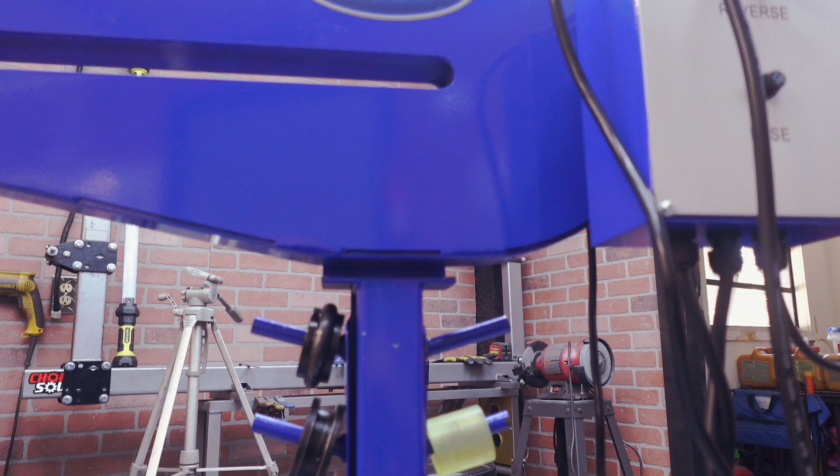But before we get started on the new build, let me show you what they sent me. Yes, we've got an electric bead roller. Look, this thing is amazing. I ordered some more dies, and they're gonna be here like tomorrow.

I know the video came out a little late, we missed the Sunday, but I have so much going on as far as getting this new build ready and ordering parts and all that stuff. So yes, we did get our own bead roller, which we're gonna need because I've got some ideas for the tank we're going to be doing on this new build.

I'm going to show you a quick sketch of it right here. A quick backstory on this sketch - normally you guys know that I do not do other people's designs. If I'm building something, it's usually my design, my build, something that I'm going to be doing for myself. And I was just searching the internet looking for some ideas, and I came across the picture you just seen, and I was intrigued.

It's very much like my style - the frame where it comes back and the seat, doing the bobber seat, all that. A lot of that is very much like what I do. Other than the fork, I've never done a fork like this before. We're gonna give it a try.

So there's some things on the frame that of course don't work. They work in drawings, but they don't work in real life. Like the wheel looks like it's touching the head tube - there's things like that that aren't gonna really work. I can't run a fender like that. There's no handlebars on it, so I don't know how that's gonna look. Handlebars definitely change up the look of a frame, so we're gonna have to figure that out as well.

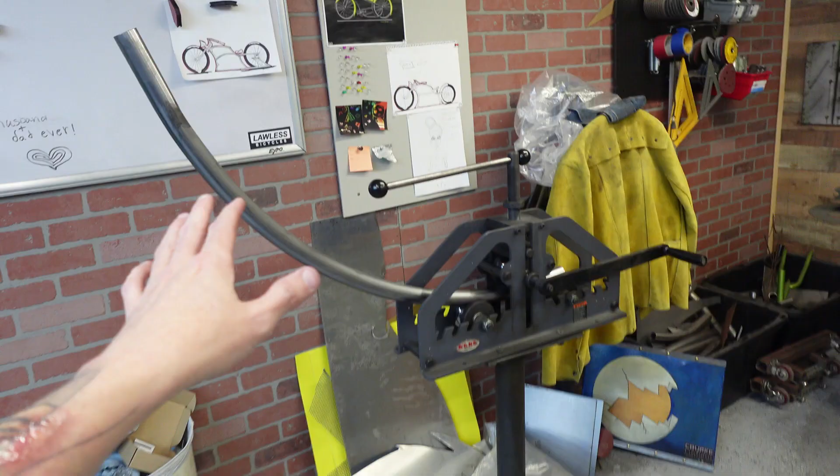All right guys, so I'm getting some stuff bent up. This is going to be the lower seat area there. I've already got this kind of bent up. This kind of looks like it's not roller bent - it looks like it might be straight and then have like a little curve up.

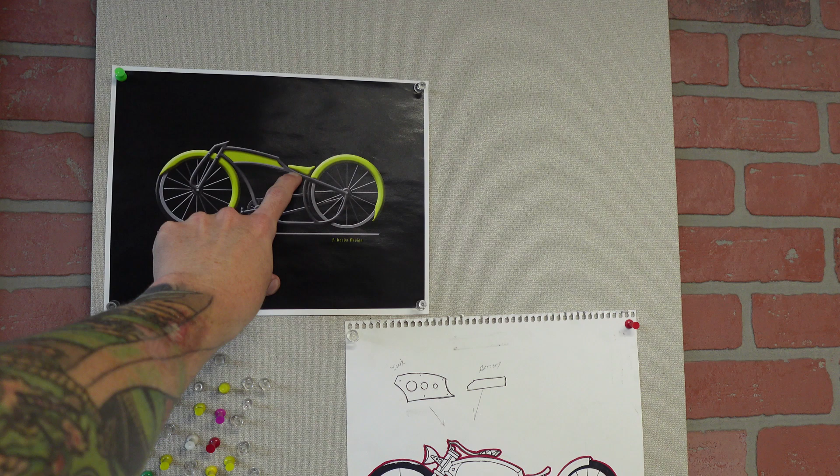So right now, got it laid down. Backbone, I think I'll use this tube here. I'll put my 1.5 inch dies in there, and then I think I'll just get it to where it kind of just goes up like that.

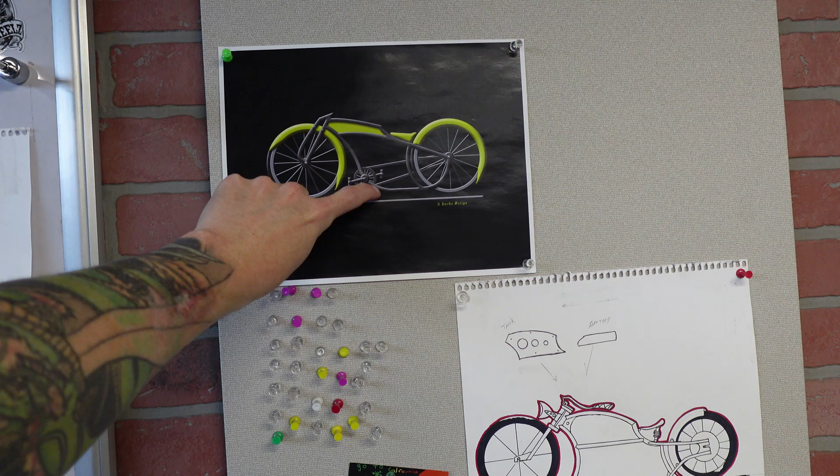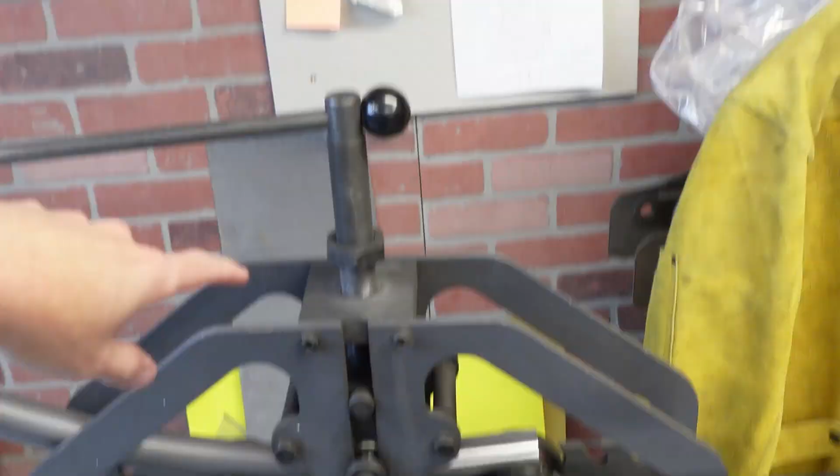Other part, we're gonna have to bend this one here slightly, and then this one here - he drew it kind of like a curve, but that curve is gonna be hard to do without causing a dent. Like if I put it in here, it's going to cause a dent right there. So if I can get it here and then roll it up, there is going to be a difference between here and here, how I do mine.

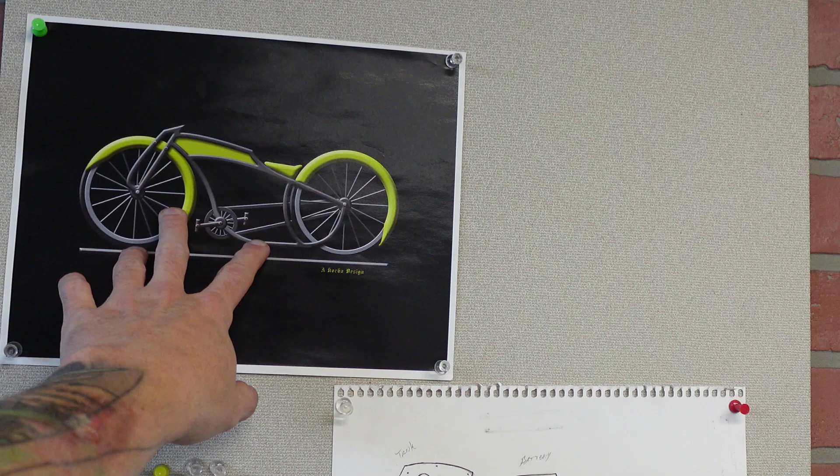So this is also a lot higher off the ground than what I would normally do. So I probably won't be this high off the ground, we'll be a little bit lower, but we'll figure that out later. I gotta draw it up on the table, but the table's kind of messy right now.

This video is gonna kind of be a lot of talking, so I apologize, but since we're working through this as I go, I can't really speed through it like I normally do because this isn't something I normally do.

So either way, I'm gonna finish bending this. I need to get a much tighter bend, and then we'll probably go ahead and jump on the other tube, the down tube, bend the down tube some. I don't want a big bend there, but it does have a little bit, and I want to get as close to the drawing as I can.

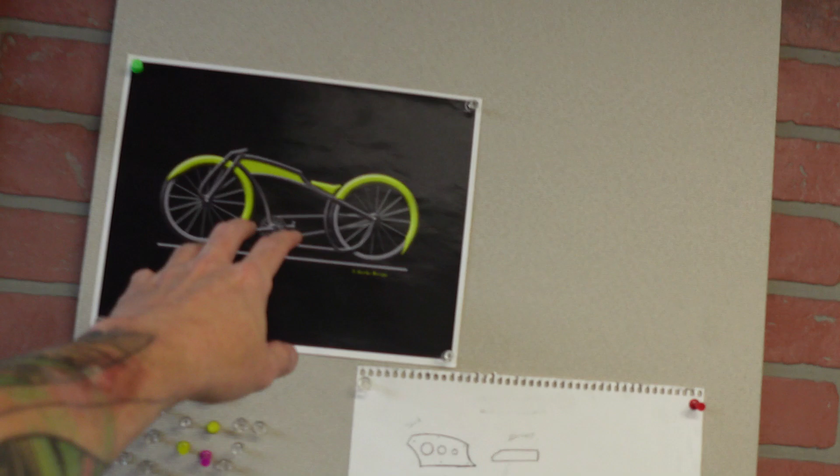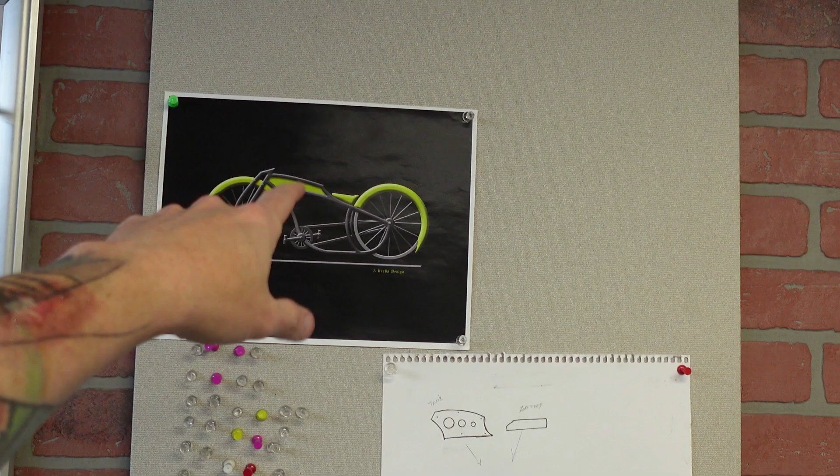We are going to run a bobber seat, but I am going to run a shock on it, not springs. We're trying to keep everything less motorcycle looking. So that's on order, just ordered the shock for the seat. I'll probably have to have another seat made because mine's brown. I want to do everything on this with black and some other colors, more sinister looking, not really hot rod looking. So, oh well, let's get to bending.

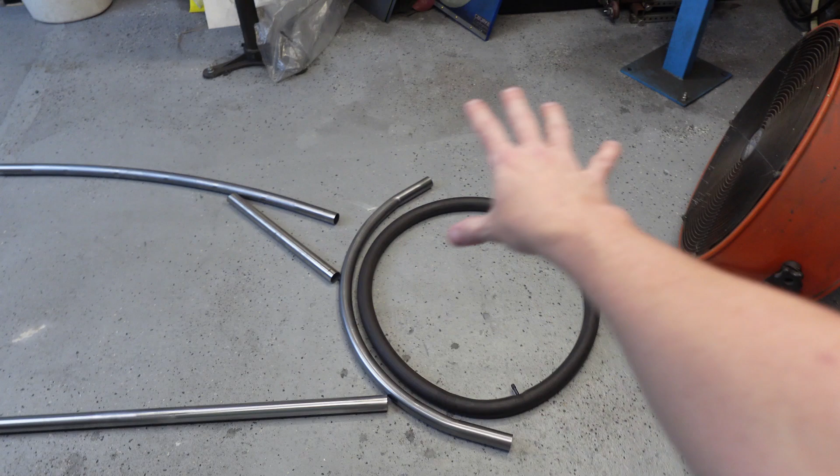So I'm just laying it on the floor. I have a 3-inch tube right here, to give me an idea of where the wheel would sit roughly to the ground. So we're just kind of feeling it out right now. That'll get chopped some, that'll get bent up. I really don't know where that's going yet. Frame, of course, won't be this wide, but I just want to lay it on the ground, kind of get an idea of where it's going to be.

Let's go clean this table off and try to get a drawing on this, because I have a feeling that because of where I put my head tube, it's going to be a little bit lower than what this frame's going to call for. We're going to have to move that head tube up, and kick it a little bit more, less of an angle. I think I'm like 56 degrees. Probably have to kick that up a little bit, give it less of an angle. But other than that, so far so good.

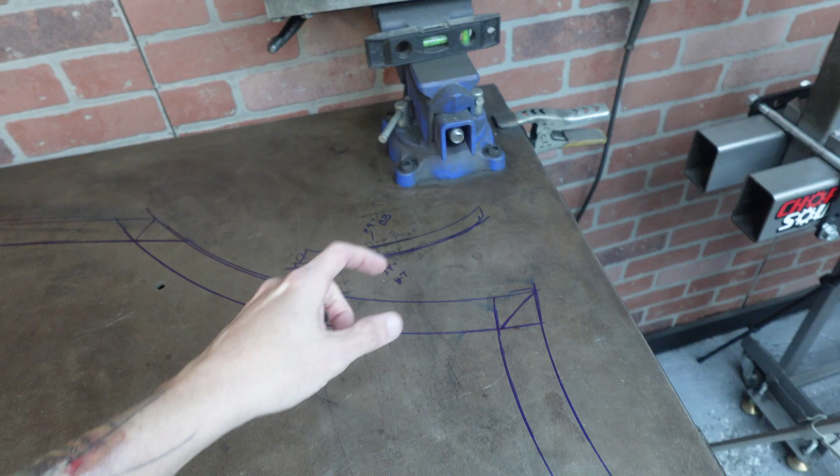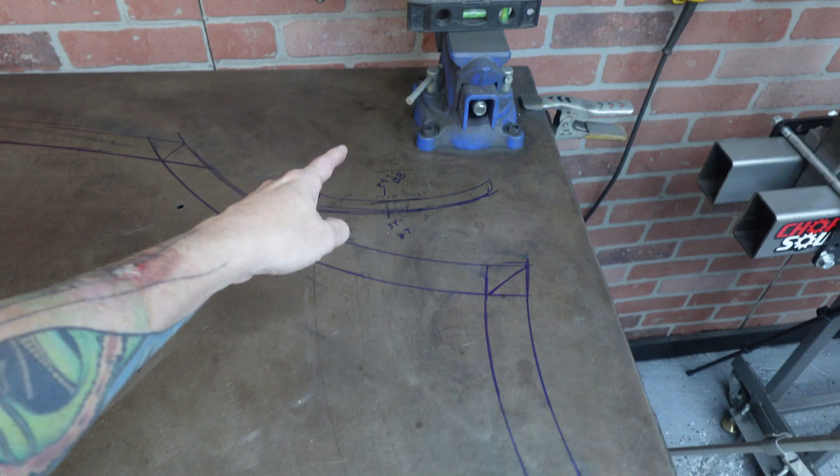After drawing this out, I think I'm gonna have to go up more and have the frame maybe come off the top of the table and then come down, and let the seat be up a little bit higher. With it being a 29, I can do that. Basically what we'll do is take the whole frame and shift it this way. So normally you're coming really far down here, but spreading out further to your bottom bracket. If I do this, I can actually shrink the frame some. Bringing the seat up will allow me to have the same distance from here to here, just do it up there, if that makes sense. So that's what I'm gonna do.

I'm getting this one bent here so that I have the down tube, but like I said, usually my issue is running into this here. If I just move it up to there, I can clamp that down, and then we'll just run that, and then work on it, because this is where the bobber seat is roughly gonna be. I can actually come a little bit further and do it that way. Let's kind of see how that works.

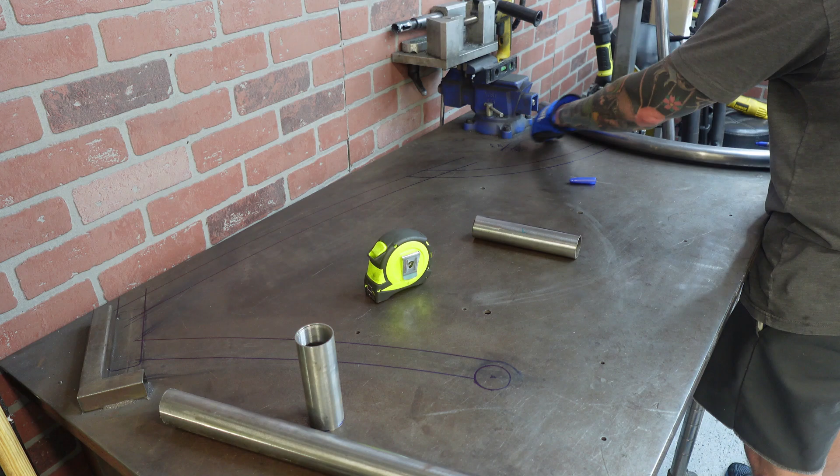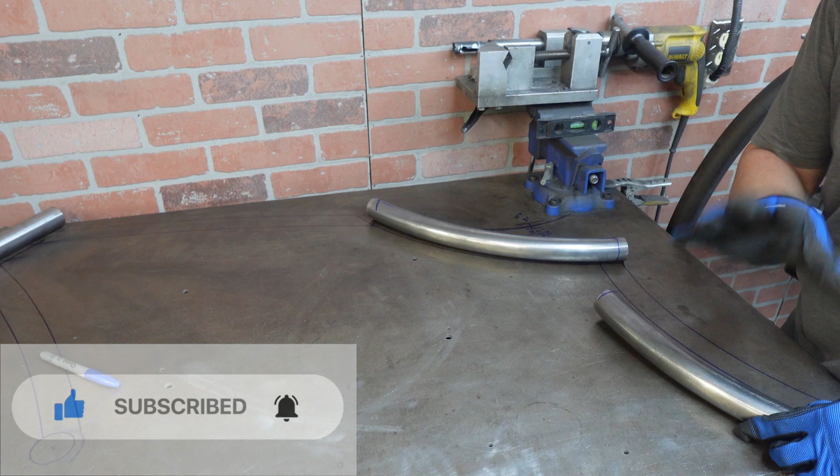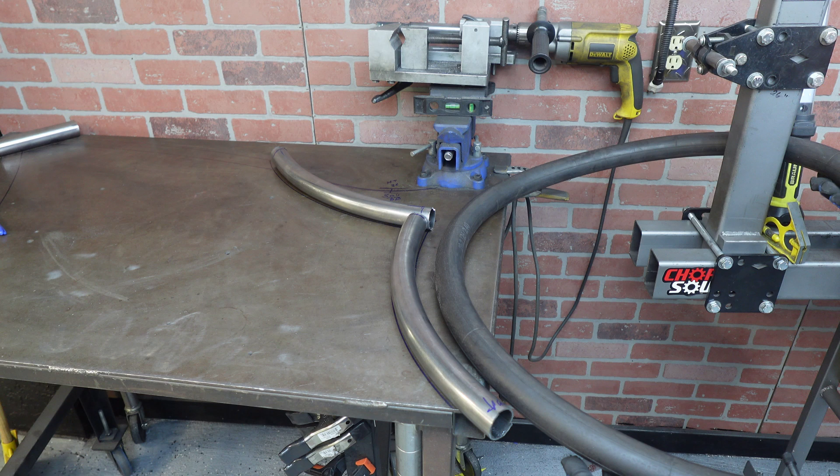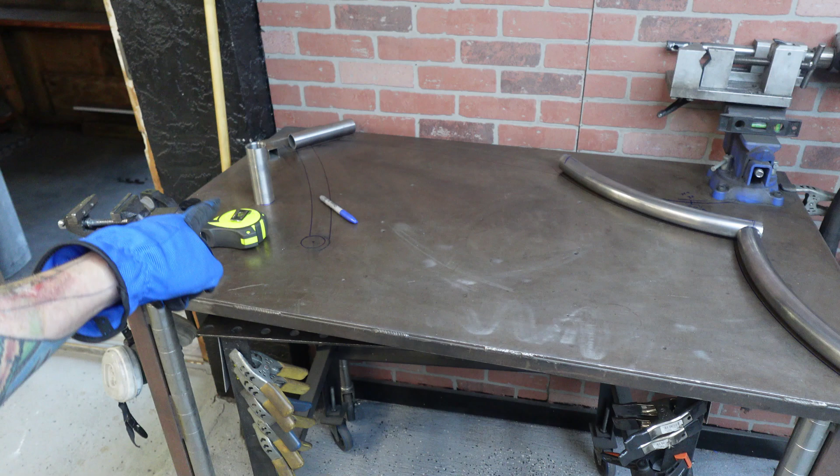So now what we got to do is cut the upper backbone. I'm going to notch it first, cut it, and then we'll go ahead and work on the down tube here, and then go throw the other tube that we have in the bender. That way we can bend up, because this angle is going to be the angle that's going to come in here, and then I need it to kick up and land in here somewhere.

You guys don't mind that bottom bracket that I'm using. That'll be a secret for later. So stay tuned and you'll find out why I'm using that.

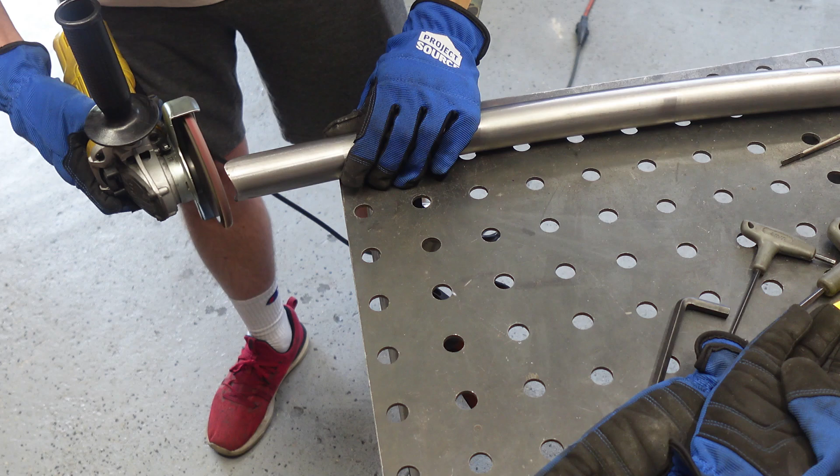Got that center section pretty much fit up. Head tube ready in place. I made a little block so I could move it up some. Everything's coped. I did move this tube in just a little more, which is fine because of where the seat's going to be. This is going to allow this to come up and have a little bit better transition.

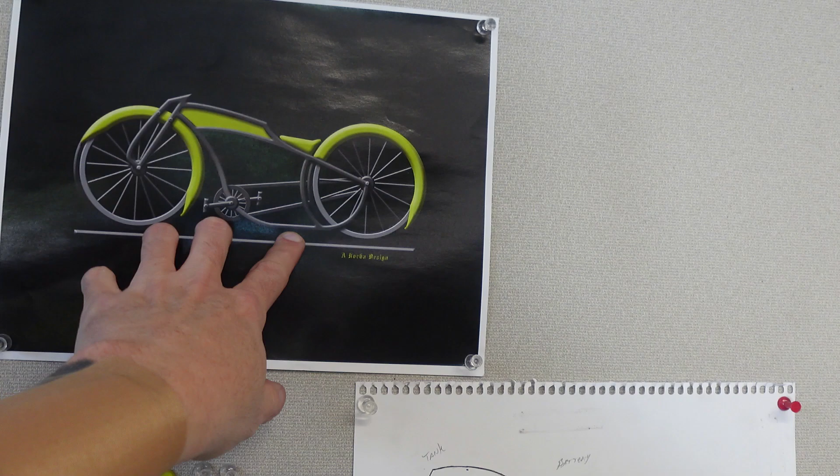This is bent up. Now, right off the bat, you're gonna notice in the picture the lower tube is a lot higher off the ground. You could probably fit your shoe plus underneath that, whereas usually mine is about as low to the ground as you can get while still fitting your shoe under it. So it's a little higher than what I'm going to do anyway, but the way he has this ran, it goes here and bends up right to the bottom bracket. You can almost tell it flowed like this was all one piece, which I can't do because he does have a bend right here.

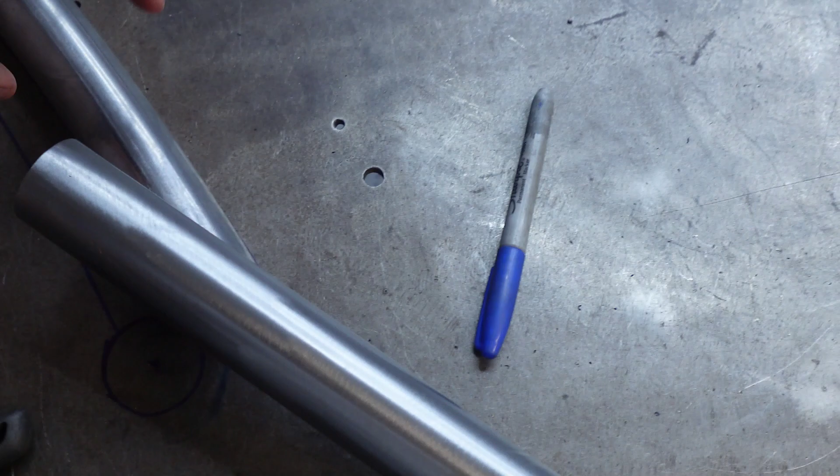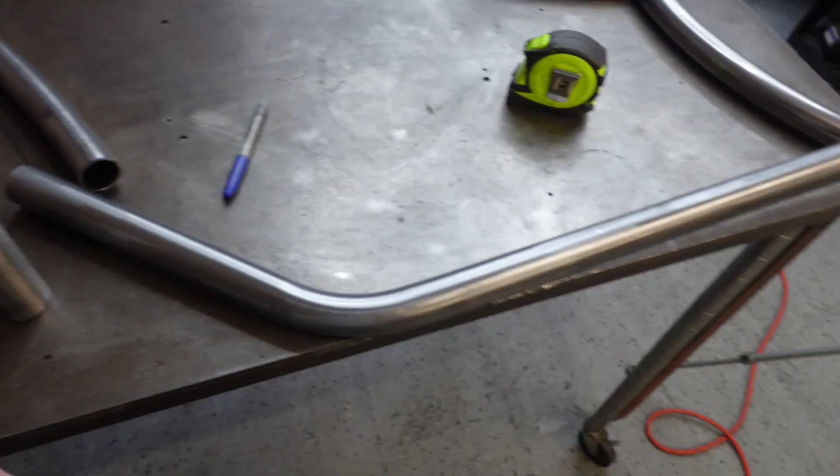So it goes this way and then has a little notch. I'm gonna try this - I think if I can stick this tube in the bender and turn it that way, just a little boop, then I think I can get this to be exactly where it needs to be so it can run and then kick that way, but it's gonna be hard to do. You can only fit so much in here - when you put the tubing in the bender, it's only going to allow you to here.

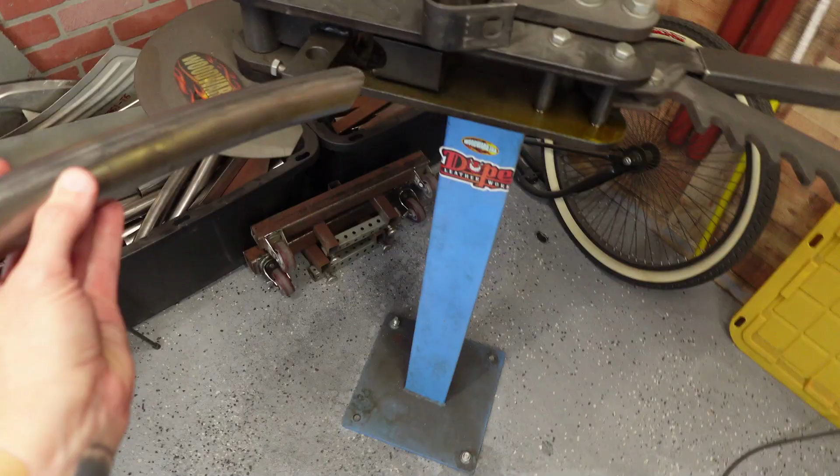So I'm gonna try. With it already being bent, that also gives you a little bit of an issue, and I don't want to mess it up, but let's stick this in there. Probably need to see how much - it's gonna go this way. So you can see when you stick a bent tube in there, it's not gonna enjoy that. I'm gonna try that right there, because this tube's as long as I want it to be, and maybe I can give it that little kick. Let's try it.

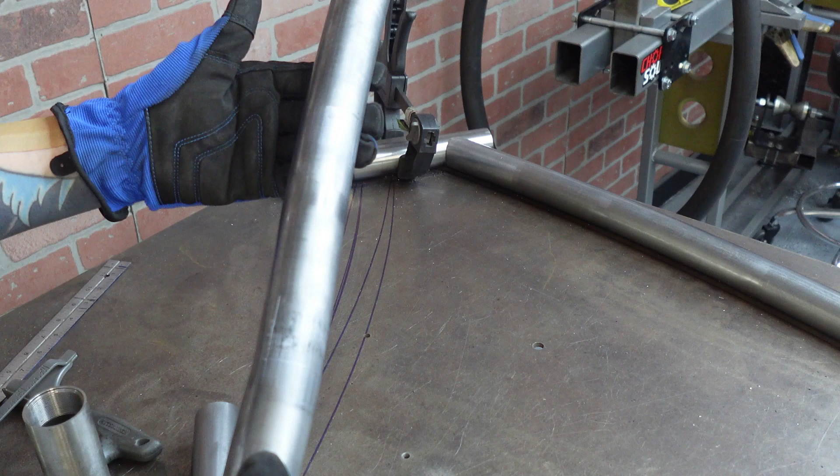That might just work. Let's set it over there and see what it does. All right, let's see - we're gonna have to do some sanding just to get the metal pretty again, but I think that's gonna work. So it's there to there, that's going to work. What I'll do is cut this at an angle so it butts up correctly, but that goes there.

This will go here. I like my bottom bracket about 8 inches from the ground, so yeah, that's about there. So that'll go in there, and that's gonna work, and then it's got that little kick. Yeah, all right, cool. Let's clean this up a little bit - that bender leaves some nice gnarly little metal scratch marks in it, so I'm just gonna clean it up before I weld it on.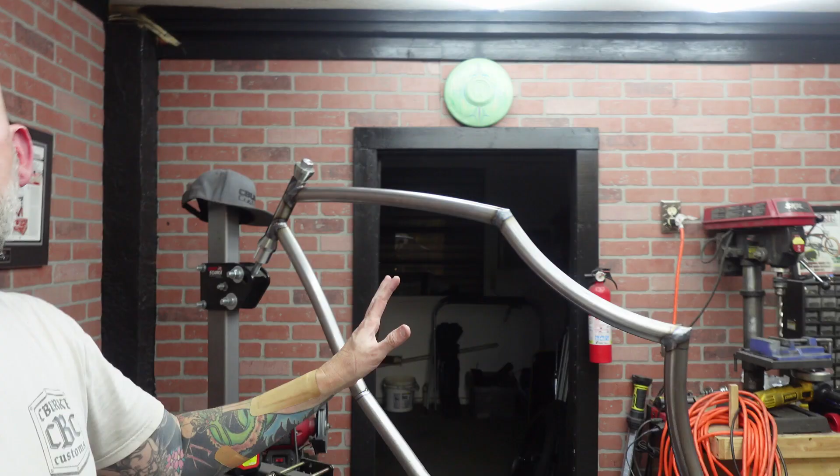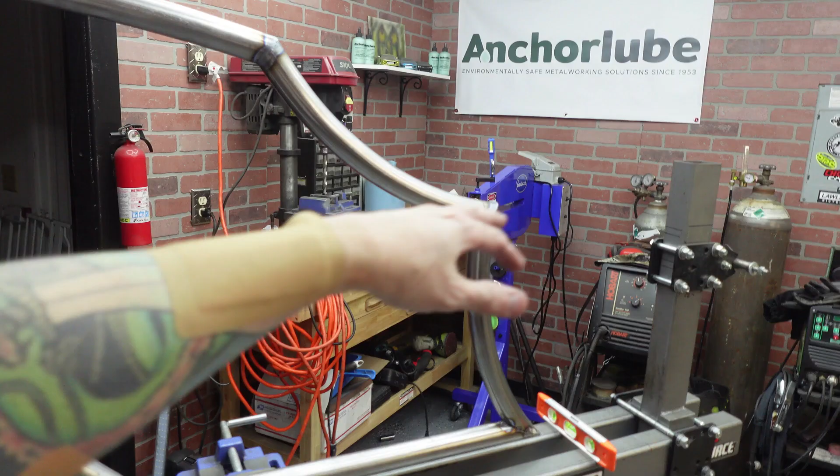I think it's close to the rendering. It will look more like the rendering once the lower chainstays are on and the seat's in there, because the upper chainstay is going to really cover this area. I think in the drawing he has the upper chainstay going like this, but I'm not going to do that because I have something I'm going to be running in this vicinity, and I need it to be a good solid tank, and we'll explain that a little bit later.

But everything's been TIG welded up. The top's going to get ground down. I don't really have to do much here because the bottom bracket is going right there, so we don't need to weld all that up. We're going to drill through that. And I do need to get the bottom down here, but I wanted to do it while it was in the jig. But she's straight, and that's what's important, is that it's super straight.

It is really high up on my head tube, and that's because we're going to be running a 29 inch wheel here so close that I don't want it to hit. So this is up quite a bit more than normal. But yeah, looking pretty good.

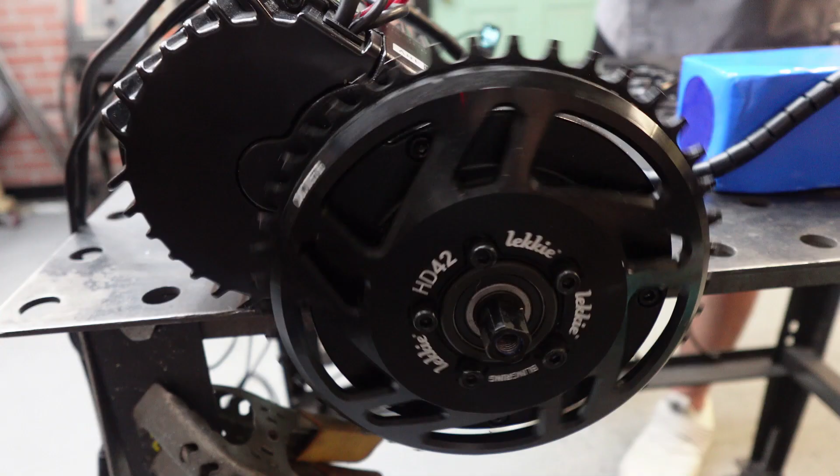This is an XT60 battery connector, and then after that, it's a Bafang parts buffet, if you will. You have your cable harness that brings you up to your handlebars. You have an extension as necessary. I brought this because you're known to build longer bikes. Yes, but I think we've got it figured out.

This is a speed sensor connection, and it has a magnet that you actually screw or clip onto the spokes, and then it passes by a sensor and allows the motor to know that the wheel is running, and then counts the number of rotations so you can calculate speed. This is a gear shift sensor. Don't think we're using this, single sprocket rear. Correct, all right. And then this is more of a minimalist SW102 display, very small, but it'll give you a speed readout, let you know your settings, and what your battery rating is.

Universal thumb throttle. We did test this out before we got the camera rolling and found that I brought the wrong brake handles, but they're definitely not needed. So we were able to get this going.

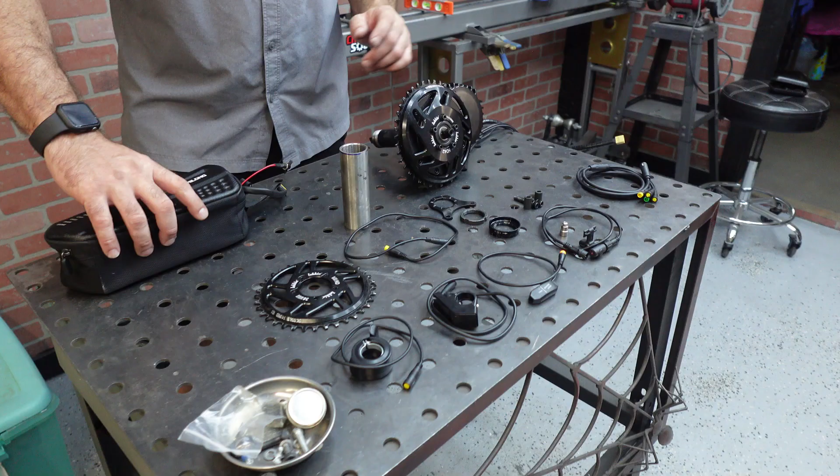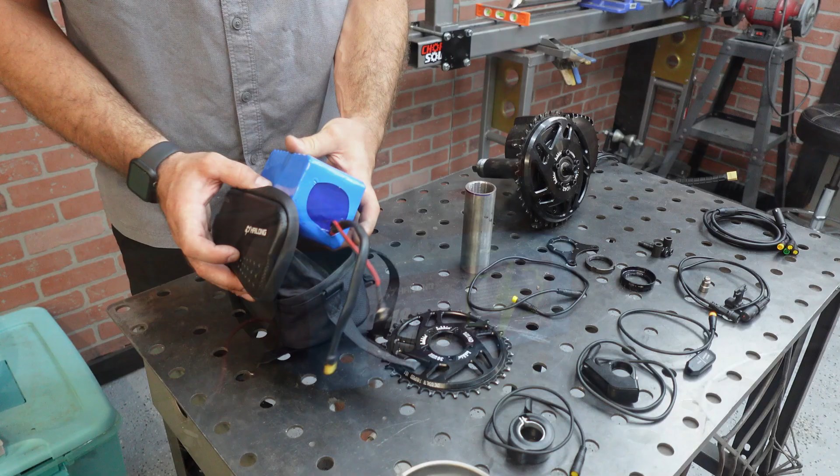It is going to be powered by a 48 volt, 10 amp hour battery. I use this battery on a lot of our dual battery videos on the Electric All Wheel channel, and that's way smaller of a battery than anything we've used. It is the most nice compact. Generally what I do is it's in the bag, and then I just strap it to the e-bike frame, and then suddenly I have more range.

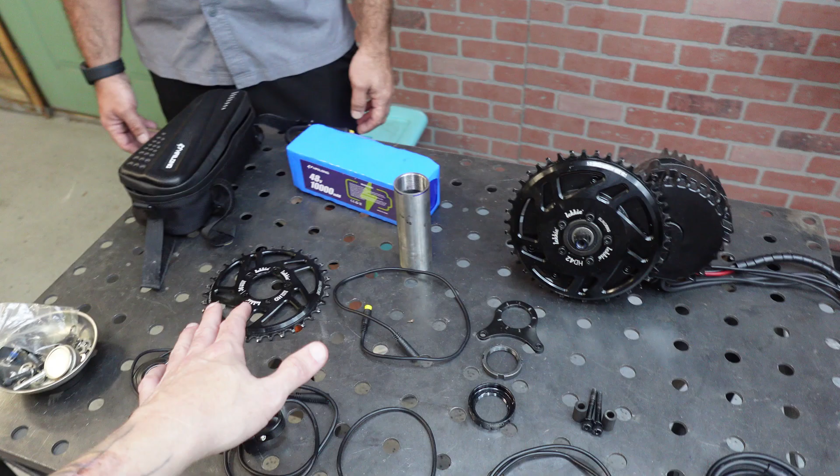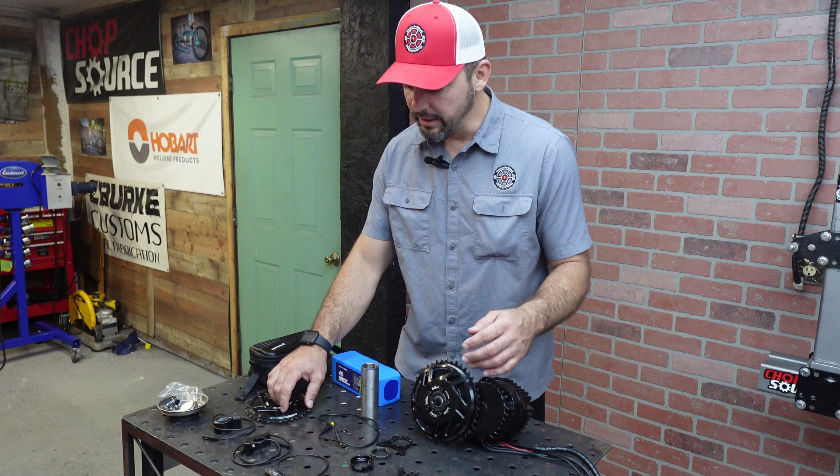Explain that. What would the difference be between using those two? So at a lesser teeth count, you have a lower gear ratio, and so the essence of that would be a lot more torque. As you move into a higher teeth count, it's harder to get it running, but once you do, you get a lot more speed out of it.

Okay. And that's where you and I differ, right? I'm a speed junkie, and you're about the slow motion. We're about going as slow and low as we can, because that's how we do it.

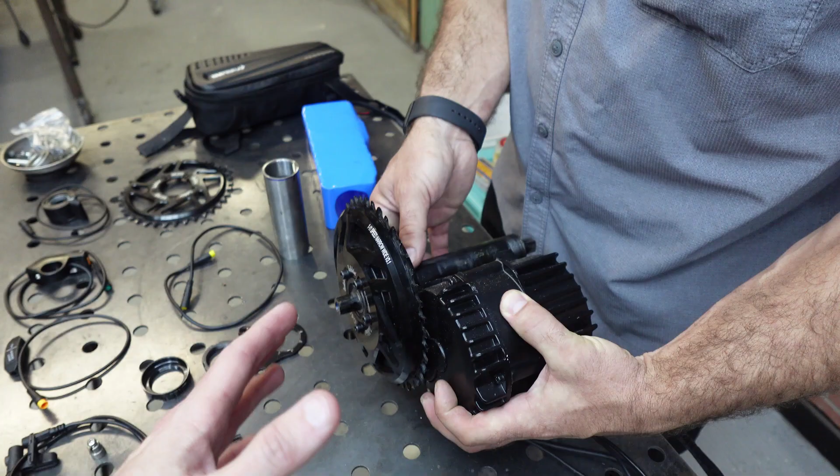So I brought a couple, I had these on hand. This one has the offset. I know that we're looking for as much as we can get. Yes, so the big deal, like my main concern, is why I had him come over with this stuff, was just really making sure that we're covering plenty of room between the back wheel and having a good chain line.

This is a threaded bottom bracket. It doesn't necessarily need to be threaded, but as you can see, it's going to slide on. All of this locks together, and what holds this on is a spline connection here. Right, and then it will sit like this.

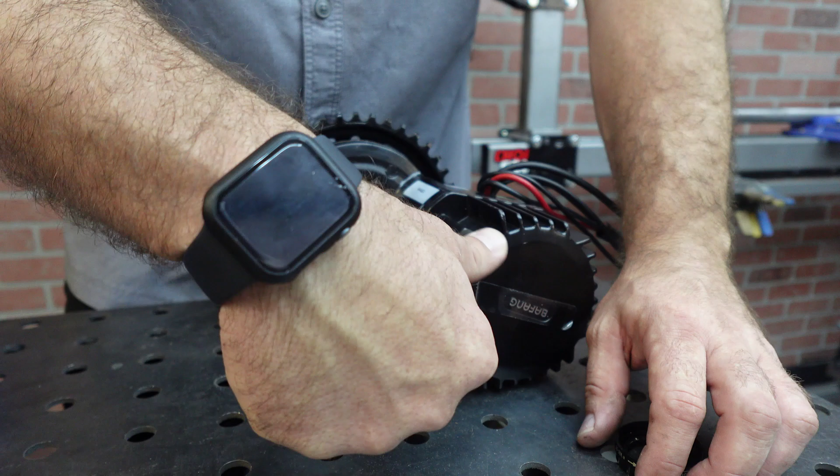There are two screws that attach to the motor itself, and spacers that go in. Then this nut will compress onto the bottom bracket. The point of that is these little ribs will get compressed into the bottom bracket and keep it from moving around.

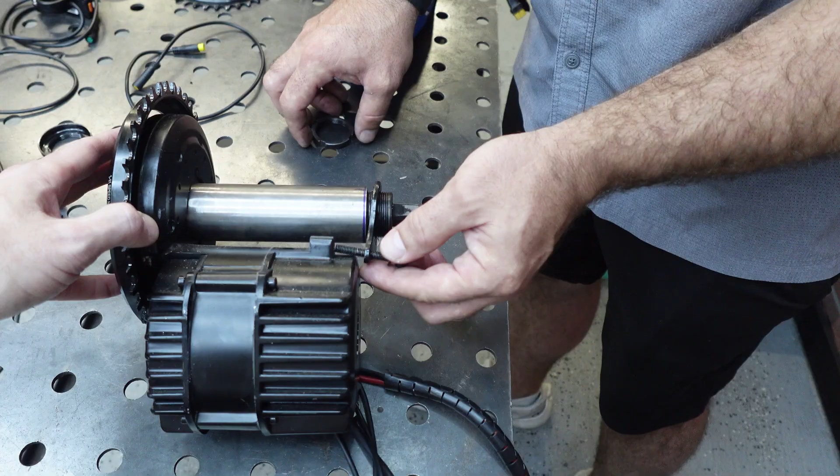We have to add an arm off of the machine here, so that when the torque—because we're thinking of running this in this vicinity—with the torque of that, you can see where it's going to run. Now with the torque, it's going to actually pull itself down, so we need some kind of arm to stop it from ripping itself off.

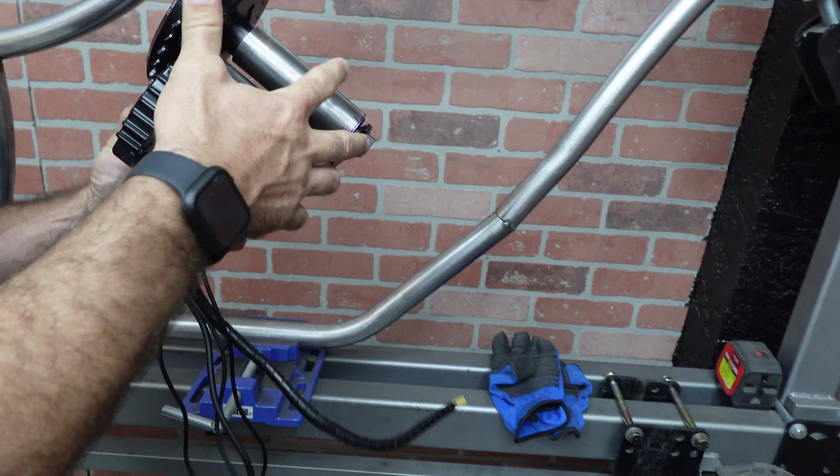On the drive side, right side, we will have to roll it over. What you're typically looking at is it sitting on the outside—this is the general industry installation. So we'll be rolling in this way, which is fine because it'll actually allow me to run my cables.

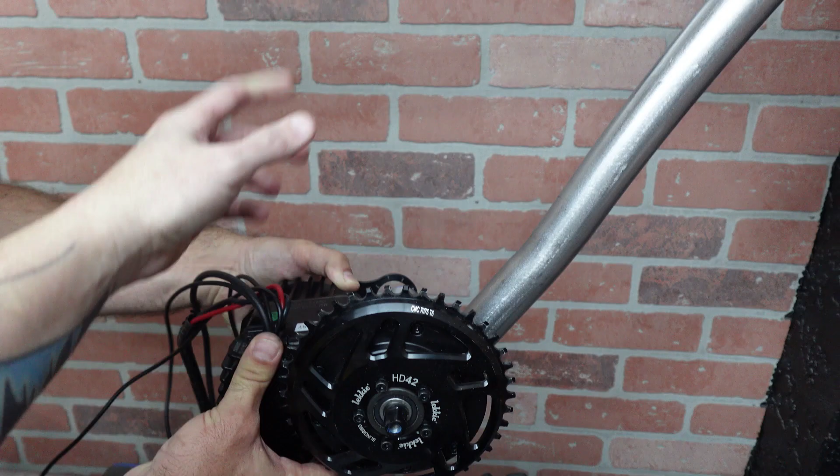Your motor is upside down though, so keep that in mind—that's one of the downsides to this. The only other way would be here, at which you're resisting the pull off of the down tube. Is there an issue with running it upside down? No, except unless you just have to deal with it. I'm not concerned with that.

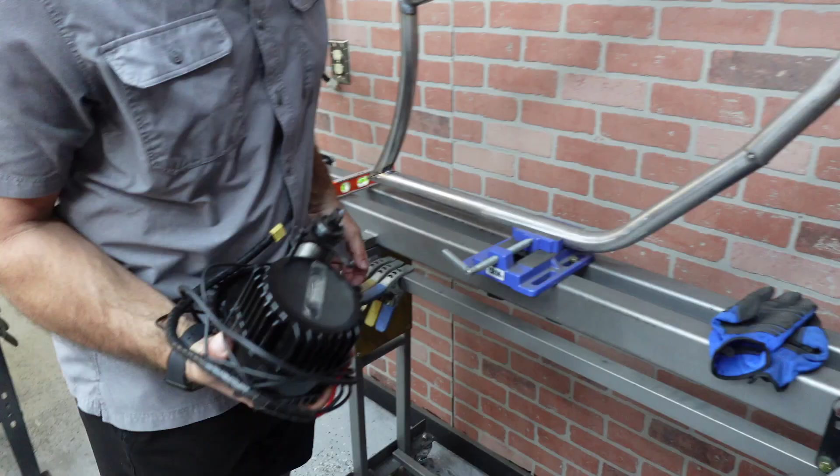Come on, look at the plastic still on there. I know, you gotta rip that up.

We're planning on running—he brought this battery. We're looking at either a battery like this, which is super small and compact, and we'll be able to stick it in the tank area, which is all gonna be covered up—you won't even know it's there. Or running a shark style battery, basically shaped kind of like his bag here, except two times bigger than that. So that's kind of where we're going with this.

We're probably going to either run a coaster brake only and see what happens, or run a coaster brake with a hydraulic front. Please use a brake. Oh yes, you're gonna give me anxiety on it. It's chopper life, and we don't use brakes here. We don't need brakes.

So yeah, this full kit is kind of pieced together, right? We don't have this premade—this is probably something that if someone needed, they could contact you for, and you could help.

In my foray into this realm, an instinctual notion is to go to Electrify Bike Company. They have preset kits where they just walk you through a drop-down selection of what you might need and what you're after. This battery isn't from them—this is Amazon—but they also sell batteries that accompany their stuff. They have really nice cube batteries, really compact, really high density, but not good power output for applications like yours, where you're looking for the tightest space so you can fabricate around that to your custom desires. And the bigger that case battery is, the more difficult it becomes.